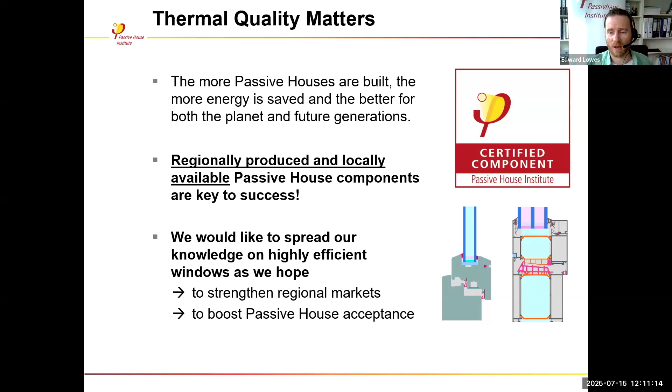An important part of being able to build to the Passive House standard is the local availability of Passive House standard construction components, such as highly insulated construction systems or high efficiency heat recovery ventilation systems, and of course, high performance windows. We can't achieve cost efficiency if we need to import these components from overseas. So that's why it's so vital that companies like Aventa choose to certify their components so that designers in the region know that there are products of sufficient quality available on the local market.

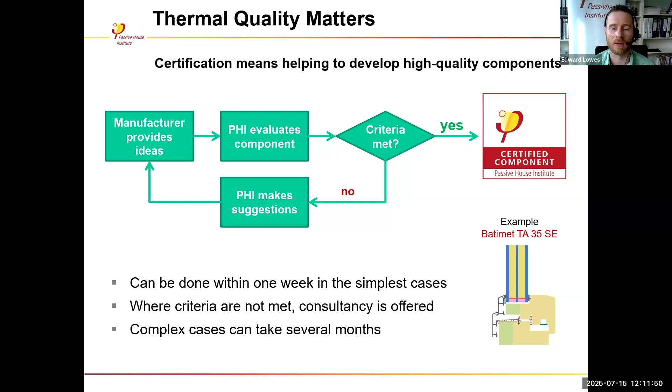So how does component certification work? Well, for windows, it's quite straightforward. The manufacturer sends us their designs, which for windows consists of CAD drawings and material thermal performance information. We then perform our evaluations, which for windows is generally software simulations using finite element method thermal simulation software. And if the applicable criteria are met, then the product can be certified. If they're not quite met, then we can provide consulting on how the design can be thermally improved.

Manufacturers who certify their components are then able to market their products with our component logo, for example, on their website or in their printed literature. And for windows, this looks like this.

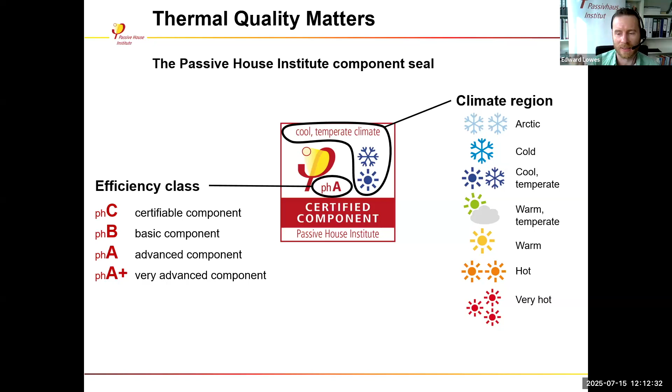They get this logo. So on the right, you can see also written at the top, you have the climate region that the product was certified for, and this goes from Arctic to very hot. And then in the middle there, we have the efficiency class. This is specific to windows, and we'll go into a bit more detail about that later on. But essentially, this is intended to encourage the development of slim windows that are also thermally very insulating and that allow for increased areas of glazing to optimize solar gains and daylighting.

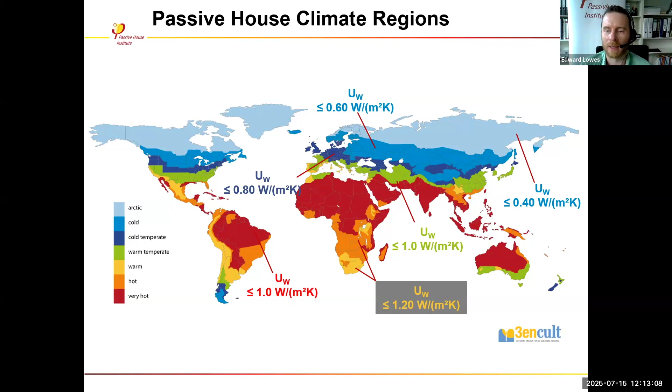And the climate regions are distributed across the globe like this. You can see that for each region, there is a specific UW value - this is the heat transfer coefficient of the window, a U value that's required. So for the cool temperate climates like Germany, where I am, this is 0.8 watts per square meter Kelvin. One climate zone warmer, the warm temperate climate, we go up to 1 watt per square meter Kelvin. And then for warm and hot climates like in the south of the US and in Mexico, it's 1.2. We'll look at what this means and how this is calculated a bit later on.

And what about the climate zone distribution around the Gulf of Mexico? Well, you can see here on the Gulf Coast of the USA, we have a hot region in Florida, and then warm going along the northern Gulf Coast, and then getting hot again in the south of Texas. And then as we get into Mexico, we can see we're getting into very hot territory at the coast, but then actually once you get up into the higher plateau in central Mexico, where Mexico City and San Miguel de Allende are located, it's a little bit cooler, so warm and hot once again, and then around onto the Yucatan Peninsula, we're back to very hot. We'll see what that equates to in terms of window design shortly.

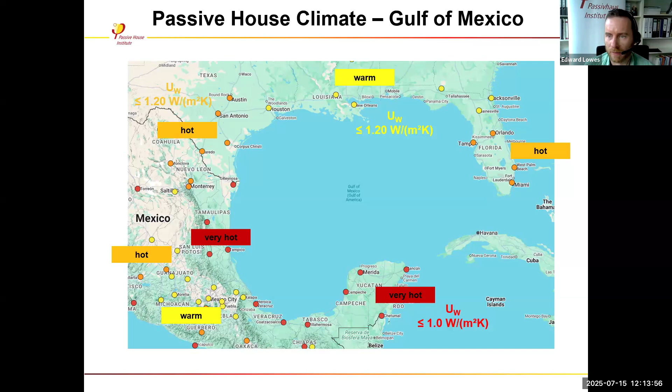But first of all, what's not included in the criteria for components, but should certainly be borne in mind for those designing to the Passive House standard in these hot and humid climate zones, it's really essential to consider both shading and solar protection glazing. Overheating of interior spaces is absolutely something we need to avoid. We also want to reduce our space cooling demand. This is even a problem here in Germany in the summertime. And the best way to do that is to add shading devices like external blinds.

This is a certified system from a German manufacturer here called Roma, together with glazing with a low G value or low solar heat gain coefficient. So this might take the form of something like a reflective film on the outside of the glazing. And in the whole context of the building, this will reduce the cooling demand as far as possible, and then, of course, ensure occupant comfort.

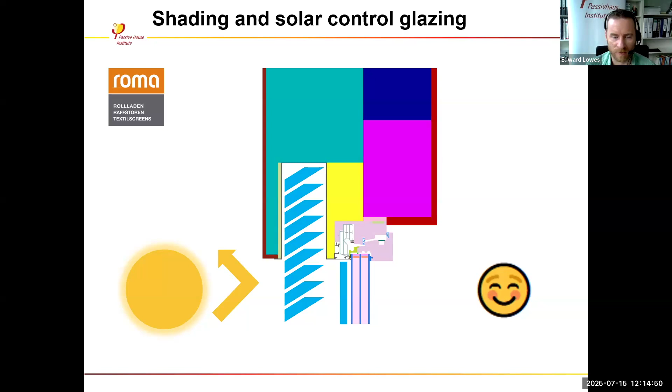And what about the window frames themselves? Well, we'll start with our newly certified window from Aventa. This is the Ventana Termoacustica.

Excuse my pronunciation, I'm sure you'll pronounce it properly later on. So this is what the window looks like in section. We can see it's made of two routed wood profiles with the glazing bar to the inside. We're using silicon sealed low emissivity double glazing with a warm edge plastic spacer at the edge.

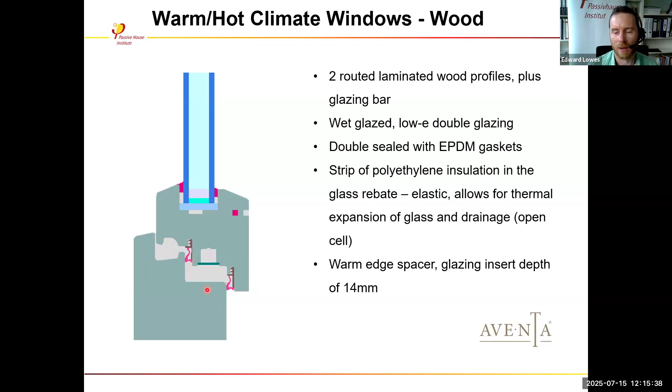Normally in conventional buildings this is made out of metal, but in passive house construction this needs to be plastic, it's less conductive. We can see the window is double sealed. I think we're using synthetic rubber gaskets, so we know that it's going to perform highly in terms of weather and also air tightness.

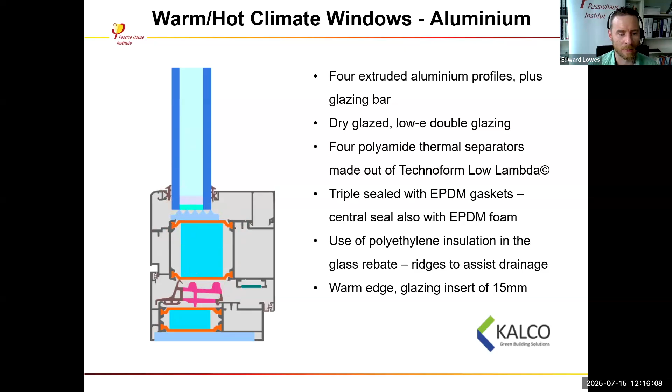This is an example of another warm/hot climate window. This time it's from a manufacturer called Kalco in India, and this is a thermally broken aluminium frame. So we can see our aluminium profiles connected together with glass fiber reinforced plastic sections and polyethylene insulation in between. Again, low emissivity double glazing with a warm edge spacer.

And then this is how a warm/hot climate zone window looks like in PVC or vinyl. This is from a Turkish manufacturer called Firatpen. So you can see we've got our extruded plastic profiles, and these have a lot of little chambers inside. So the chambers actually mitigate the need for actual insulation material inside the frame, so we don't need that here.

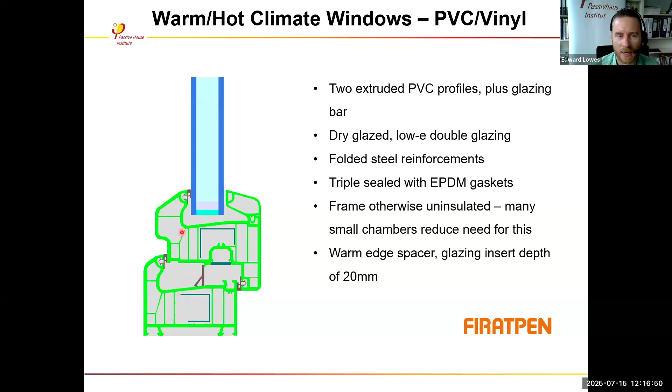And then here in the middle we have these folded steel reinforcements. In some windows, in more strict climate zones, these might be made from glass fiber reinforced plastic, but for warm and hot, it's absolutely fine to use steel. And then again, we have our low E double glazing with a warm edge spacer.

If we go to the very hot climate, we can see how the design of the window changes quite significantly. So this is our only example of a very hot certified window on our database. And this is from the UAE branch of a Greek manufacturer called Alumil. And we can see how much thicker the frame gets and how much taller.

It has much wider thermal separators, and you can see there's quite a lot of insulation in the cavities there. In this case, the insulation is made from aerogel, but actually it doesn't need to be made from aerogel. It could be made from a more basic insulation like EPS or polyurethane, and they still would have met the certification standard, but I think they wanted to develop a kind of concept window here.

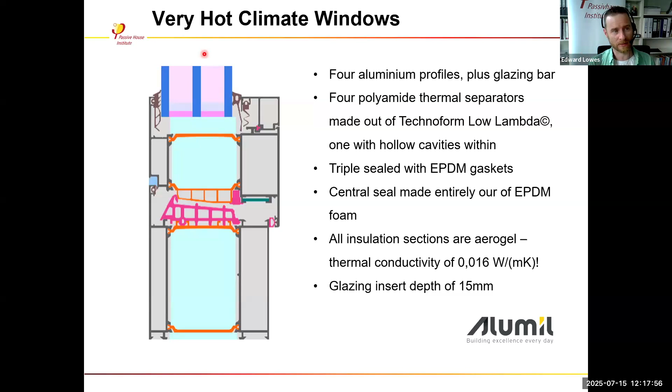But then probably most notable is that we've gone from low E double glazing to low E triple glazing, because once we're in the very hot climate zone, the U value requirement actually gets more strict in comparison to the warm and hot climate zones, because we're much more concerned with keeping heat out of the building and reducing our cooling demand and keeping the interior comfortable.

So let's take a quick look at Aventa's certificate. The format is more or less the same for all certified transparent components, so just the color scheme changes, and you can see the map there where the applicable climate regions are on the globe.

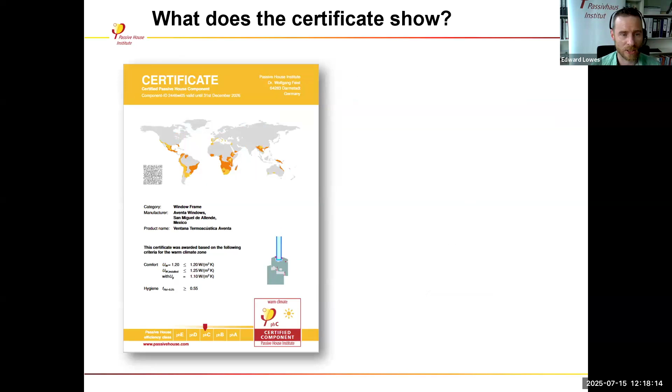And we can see here the criteria that needed to be met for certification. So a UW value of 1.2 watts per square meter Kelvin, UW installed value of 1.25. So we have this slight additional allowance to account for the installation thermal bridges of the window. And we can see we used a reference UG value, the heat transfer coefficient of the glazing.

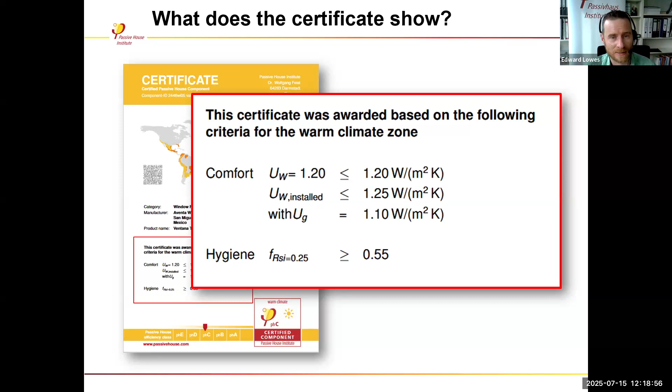Here we used 1.1. And then at the bottom, you can see this is the temperature factor that needed to be met, which is to do with the coldest point of the interior surface. That means that on cold days - and actually I read that in San Miguel de Allende it got down to -10 at one point - we need to make sure that on colder days like this, there's going to be no risk of condensation or mold growth over time.

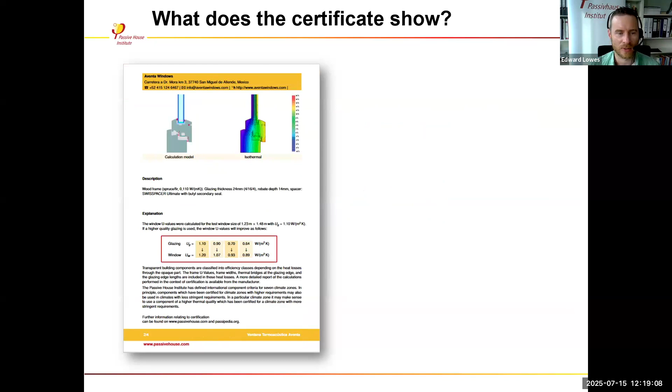Inside the certificate, we can see a product description and an explanation of the certification. We also get this handy table, which shows us what the UW value will be when we use different glazing UG values.

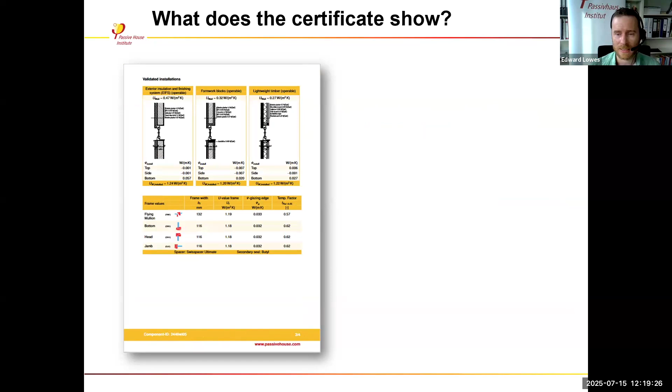Following that, we can see how the window performs when installed in 3 different passive house standard wall types. Here we used specifically a concrete wall with an EIFS system, a concrete formwork wall, and also lightweight timber construction.

If we look at the first example, we can see the detail of the wall buildup and how the window should be positioned within the wall. For EIFS, usually the window sits in the concrete layer. For colder climates, it might be shifted out into the insulation layer because it performs better that way.

In any case, you can see that at the top of the window, and this would be the same detail also at the sides, the window is covered to the outside with insulation. This is kind of a hallmark passive house construction type detail.

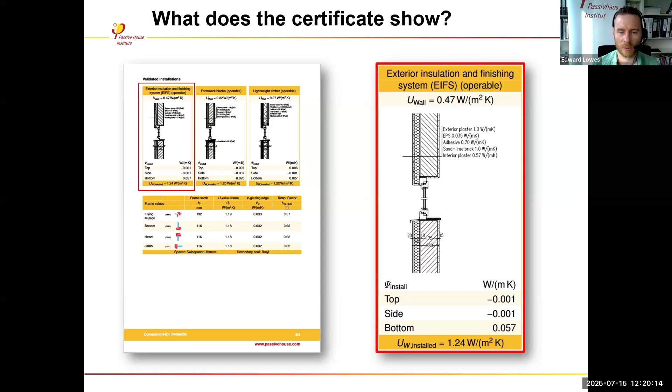And then at the bottom, we've got our installation thermal bridges. A couple of those are negative, which are then contributing to achieving this 1.24 watts per square meter Kelvin UW install value.

We need it to be under 1.25, so this is a certifiable value. We'll take a quick look at how these values are calculated, and then I will hand over to Gert. So we follow the ISO standard 10077 part 1 for this, with a reference size of 1.23 by 1.48 meters.

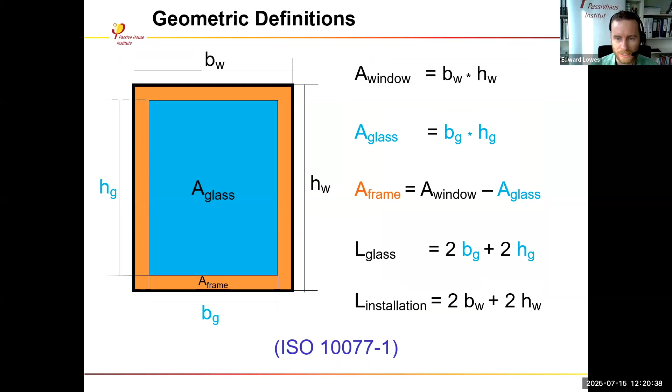We take the area of the glazing, the area of the frame, the length of the glazing edge, and then the length of the installation. And we plug all of those into this formula.

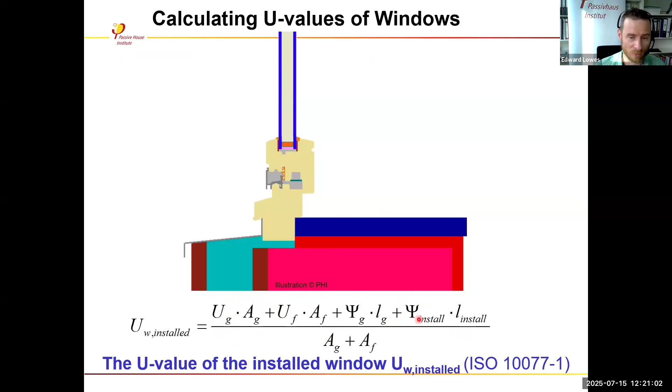It is the U value of the glazing multiplied by the area of the glazing plus the U value of the frame multiplied by the area of the frame plus the psi value, the linear heat loss coefficient of the glazing edge multiplied by the length, plus something that is not in ISO 10077 part 1, but that we add because we believe it to be important.

This arrow here is the thermal bridge at the point of installation between the window, the frame, and the external wall. All this divided by the area of the window, AG plus AF, gives us our UW installed value, which is what we're then comparing against the criteria for certification.

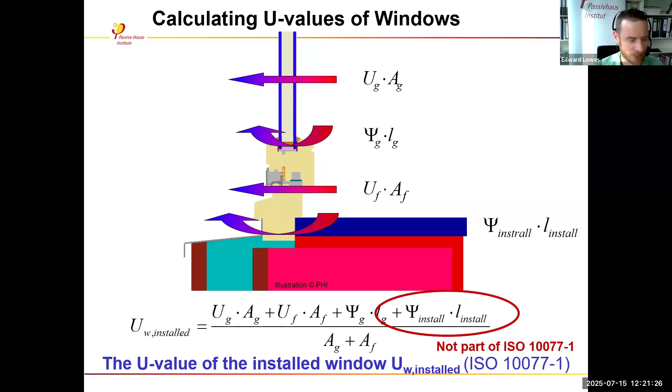From our UF and psi G values that we got from our thermal modeling — I'm aware this looks very dense, but essentially it means we can calculate our psi opaque, which is our way of ranking window frames in terms of the balance between the opaque part and the glazing. The lower the area and the lower the U value of the frame, the lower the linear heat loss coefficient of the glazing edge bond, the lower our psi opaque value.

This is what we have in our table here, and it equates to our passive house efficiency class from PHC to PHA+. Essentially, the skinnier and better performing the frame thermally, the better the efficiency class. I should say, however, that the vast majority of components are either PHC or PHB efficiency class in our database. PHA and PHA+ are kind of the outliers.

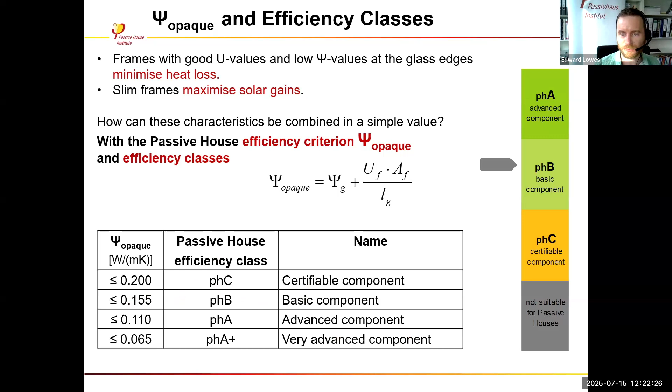But yeah, this is how our system works. Okay, so that's all from me. Thank you everybody for listening, and I will hand over to Gert from Aventa Windows.

Okay, great, Edward, thank you very much. I think even though I'm a bit into windows, it's mind-boggling to follow your presentation, and you have to digest that. But on the other hand, I think it's very impressive what passive house — I think you have 30 years of existence, or 35 — what you have developed in this time frame, that we really have hard facts and can back up proper design for different areas in the world, for different climate zones. I think it's a big step forward, and I was always impressed by your institute and what you have achieved over the last 30, 40 years.

With this, let me take a little bit more of a 10,000 foot view of the subject, a bit opposite of yours. You know all the details at a very high scientific level, so let me do it a little bit more in general terms.

I would like to say that over the last 3 or 4 decades, this idea of a passive house and using less energy, especially for our living spaces, has been around for maybe 40, 50 years, but it has accelerated in this time. This push has been very interesting. I think we've all gained a lot in those last 40 years through the development of a global economy, and we've all benefited from the economies of scale which it has provided.